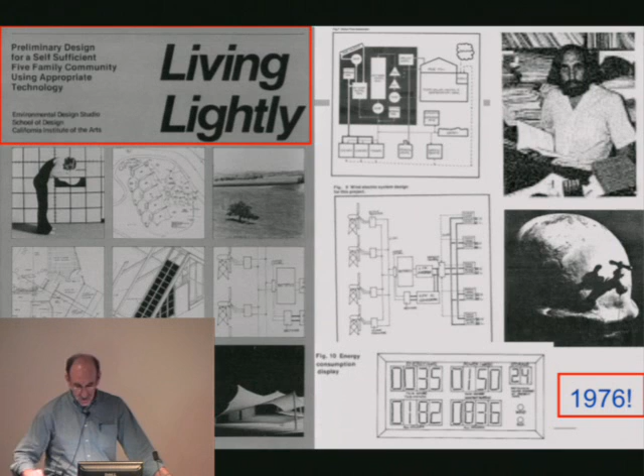So this is only 35 years ago. A lot of the ideas we're talking about here aren't exactly new. That doesn't mean they're bad or useless, but it's also useful to go back and look at what people have been doing in the past and ask why none of this made any difference for the last 35 years, and what we can do differently now that might change that.

I think most of you know the big picture for buildings — did I skip one there? No, I decided not to use it. Buildings are the largest and fastest growing end use of energy.

On the electricity side, buildings account for over 70% of all electricity used. So when people talk about smart grids, they're typically talking about power plants, transmission lines, sensors and networks. But when I think about the smart grid, I think about where it's all going, which is buildings.

It would be nice if there was one thing we could invent or develop that would, quote, solve the building energy problem. But there isn't. This breaks it down by residential, commercial, and by end use — there's about 20 different end uses that constitute probably 80 or 90% of the energy used in buildings. If you're going to make a big dent in that energy use, you're going to have to address all of those. This is a slide from McKinsey that you've probably all seen before.

Cost of carbon and savings on the horizontal scale — the ones on the left, below the line, are the ones that pay back. What's intriguing is not the data, because quite frankly I can show you studies from 20 years ago that look a little different but say the same thing.

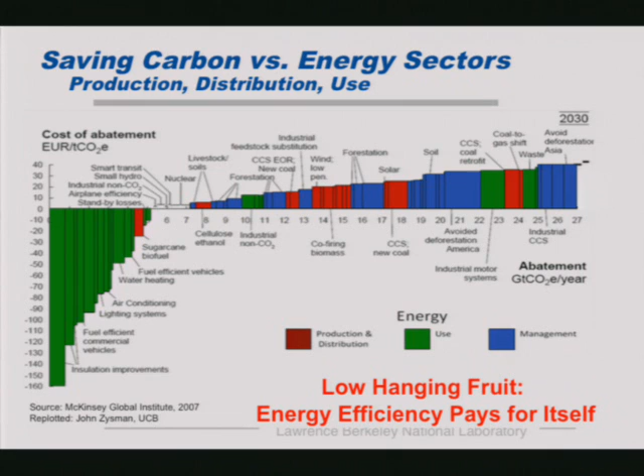The way I look at this is, if this is real, and I think it is in terms of the data, the stuff on the left shouldn't exist. If we're economically rational beings, and this stuff has 1, 2, and 5-year paybacks, why does it even exist? It also tells you it's not enough to simply come up with technical solutions — you need to figure out what the obstacles and impediments to the marketplace are. Otherwise, we'll simply grow the curve on the left even larger.

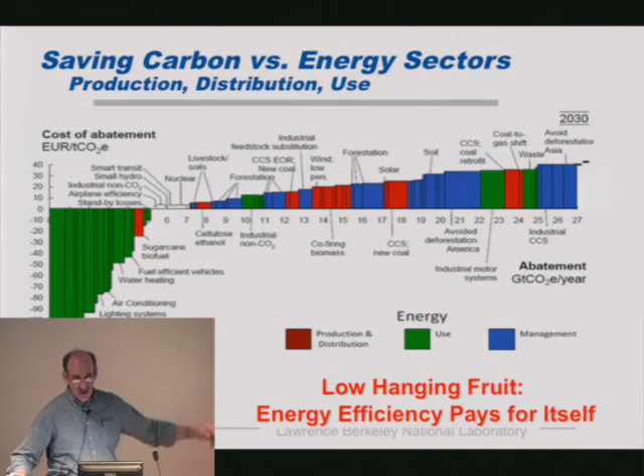If you look at the building sector, you come away quickly with this being a messy, complicated set of things to look at. There's a complex decision-making process, a lot of people involved, a lot of money involved, which makes it complicated, and long lifetimes involved here. And the industry is fundamentally fragmented.

You go to two owners of identical buildings — one owns it, one leases it — and you get completely different responses and levels of interest. The bottom line, though, is the savings potentials are huge, and that's what we need to pay attention to.

Sometimes people ask me, what is it we should do? How do we approach the problem? Who's in charge? Who needs to take ownership of this? The answer is pretty much everybody. This is classic — if you ask an architect what the energy problem is, you get one answer. If you ask a researcher what the problem is, you get another. They're all right, and frankly they all have to work together to make this work.

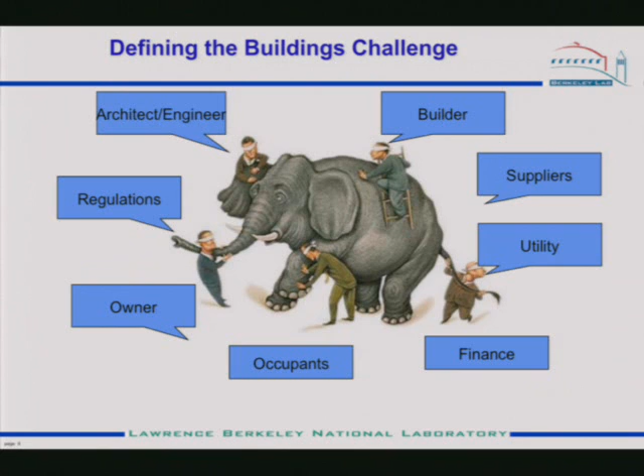You can ask the question, is there evidence that if we do something, it will matter? This is a chart I'm sure many of you have seen before. It plots electricity use per capita in California versus the country. You don't have to be a rocket scientist to say that California is doing something different here. Something has changed, and it's interesting to go back and look.

There's a lot of subtleties here, and there's plenty of work for someone to dig in and do multiple theses over time. But the bottom line is California has a policy to reduce energy use as much as possible, and it's backed that policy with investments in research, deployment, and a variety of other activities. Now, I'd argue this is a good news, bad news graph.

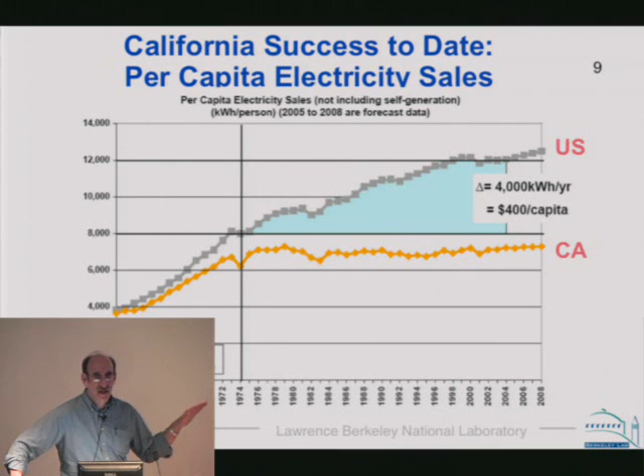The good news, of course, is it's flat and it's different than the U.S. The bad news is if you look at absolute energy, it's grown by 30 or 40% because the population of the state has grown. So we need to be careful here. This is per capita, not absolutes. And what we're trying to do in the carbon world is to reduce absolutes.

Now, California continues to be aggressive, and it's a model for the rest of the country in many ways. They've developed a series of goals to 2020 and 2030. I'm going to talk a little bit about this zero energy building goal in a second. These are the right kinds of goals, but they're very aggressive. I don't think in the real world today, in the environment we live in, that these are achievable. Technically, they could be achieved if we put our minds to it, if the politicians decided they wanted to do it. It could happen.

If I look at Washington and look at the healthcare debate, I get a bit frustrated and sort of pessimistic. But anyway, let's go on to more exciting things.

So the question again: can you make a difference? Can you do something that makes a difference? This is a chart from some of my colleagues looking at the energy use in refrigerators over time. The blue chart shows the energy use. It rose almost linearly from the 40s or 50s up to 1973, and then all of a sudden something happened in '73, and it tipped over and went down almost as fast as it went up.

What happened was a whole series of mandates, standards put in place first by the state and then by the feds. Now the interesting thing is there are two other plots here.

The red plot shows the size of refrigerators, and you see they were increasing for a while, and you could argue the reason the energy use went up was because they were getting bigger. There's a little moral there too: if you extrapolate anything - I once did the calculation - in 2200, refrigerators would be larger than houses. So it makes you think you should be careful about extrapolating trends, right? It levels off because you can't get them through doors anymore. Once you can't get a fridge through the door, the size levels off, more or less.

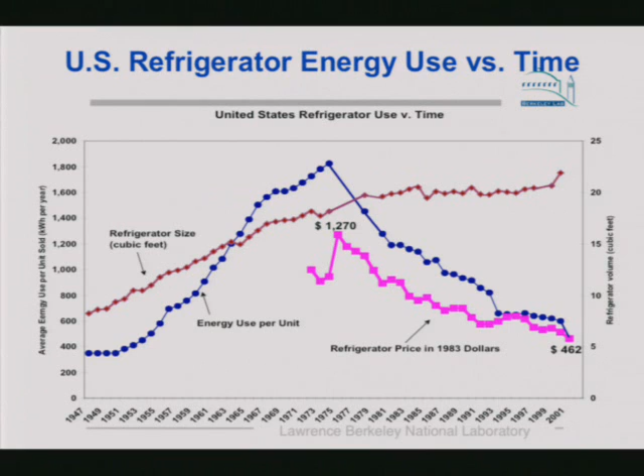Here's some other evidence from a National Academy study done about 10 years ago. They went back and looked at research from the 80s, and looked at 4 or 5 different things, a number of which we were involved in: window coatings, ballasts for lights, the appliance standards I just talked about. They calculated the market impacts and the savings, and they also went back and looked at the R&D investments. To oversimplify a bit, these were R&D investments on the order of tens of millions of dollars, and they delivered savings at the level of tens of billions of dollars.

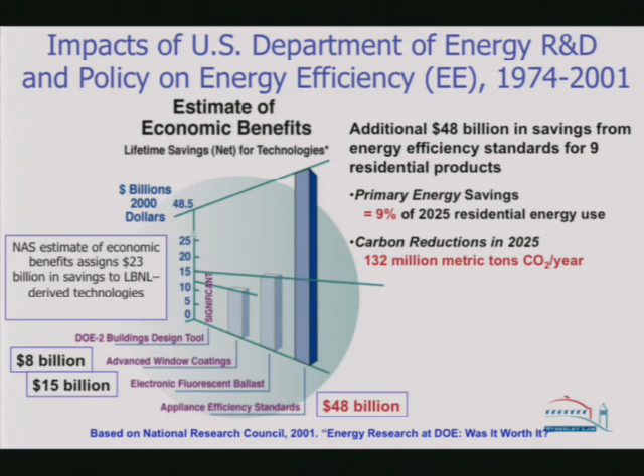So if you're a country or a state making investments in research, if you get even a few of them to have big payoffs, as was shown here, they more than pay for the entire portfolio of activities.

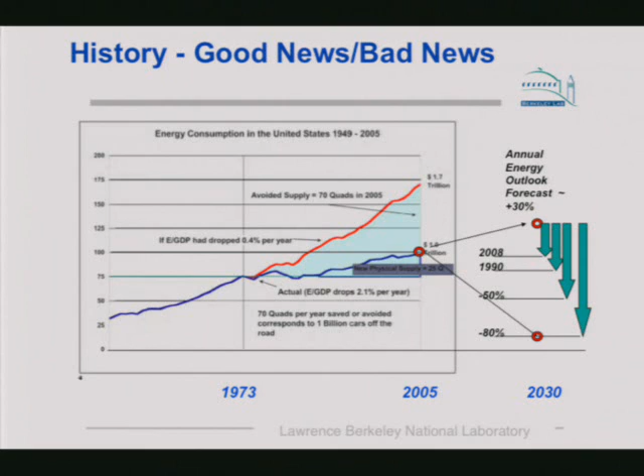So here's the challenge for the country now. Gone from the state and refrigerators to the country and all energy use. The blue line is actual total energy use for the country up to 2005. The red line, starting in '73, is what we would have used had we continued to use energy at the same rate as before, in terms of energy per unit GDP. So again, the good news is that we've slowed the rate of growth, but we're still growing.

And if you look at the right, these are various requirements at state and federal levels to reduce energy to either 1990 levels, or by 50%, or by 80%, out in either 2030 or 2050. It's a lot more complicated than this - some of these requirements are carbon, not energy, and that adds another dimension to the problem. But the point I want to make is that all of these mandate reductions in absolute energy use, and we've never done that before - well, we've never done that at the societal level or the sector level.

I just showed you that we did it at the refrigerator level. So there's a real challenge and an opportunity. One of the things we've done is we built models, business models or economic models, and energy models of the building stock. This is one of the commercial stock.

We can plug in scenarios here over time. Here we go from 2010 to 2030, with new buildings, retrofits, renovations, and the degree of savings in each one. We can add some PV if we want to, and on the right you can see what happens as business as usual, shown as the dotted line. We've actually managed to make the energy use of the commercial sector bend over and decrease in absolute terms, and by playing with charts like this you can begin to get a sense of what you need to do, either technically or policy or both.

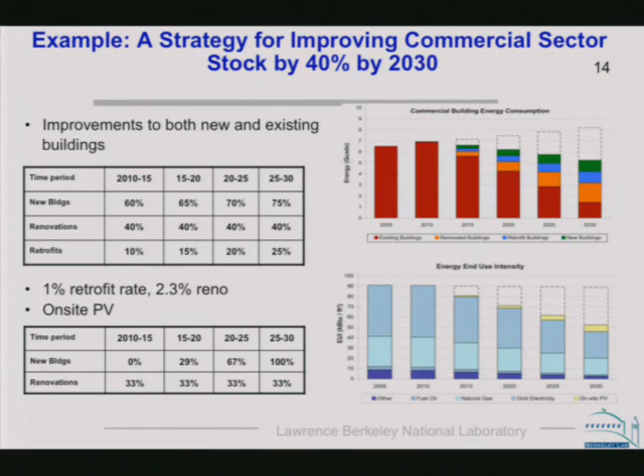So here's an example of implementing this as a policy: new construction saves, or half of the new buildings built save 50%, and every year you retrofit 10% of the buildings and save 50%. It's a whole other discussion about whether that's feasible or practical, but this is the resultant curve. It shows a decrease for about 10 years and you meet the 2020 goal, but because you're not aggressive enough in new construction, it rises over time in the end.

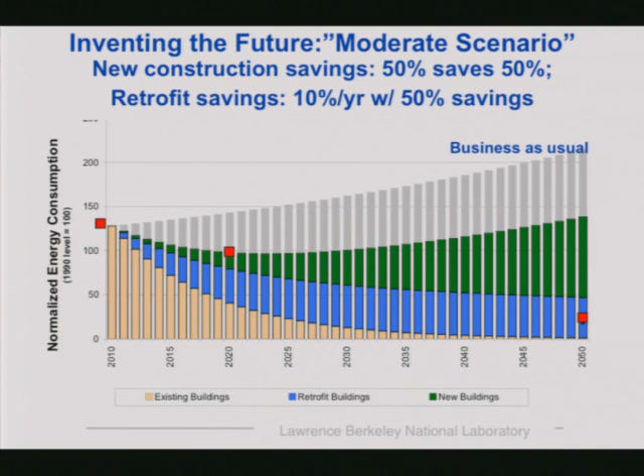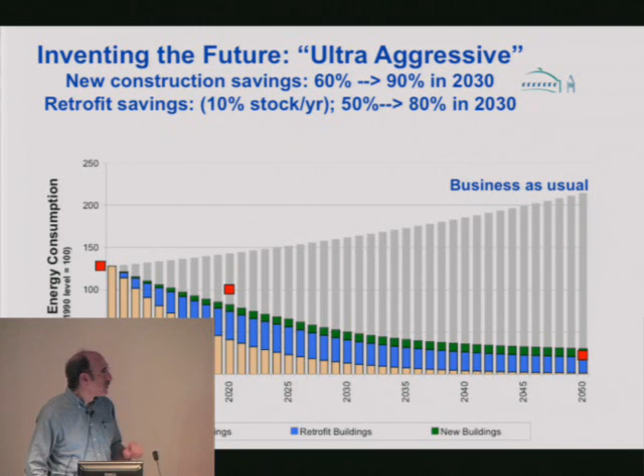Here's a scenario that actually gets you to this amazing 80% reduction goal by 2050, but this is a sort of superhuman effort where basically all new and existing buildings are using only 10 or 20% of what they're using now. But it's an interesting tool to give you a sense of the magnitude of what you need.

So this concept of a zero energy building, a net zero energy building—some people take it literally, that if you take a building and put enough PV on the roof, you bring the energy use down to zero. A net zero building is actually a building that generates as much as it uses, therefore its net impact is zero.

So there's a group out there that says, sure, we can do it, we can find 5 or 10 buildings around the country that have done it, let's just go do it. I think it clearly is technically achievable, but it's not financially viable, and it's probably not the right thing to do if the building you start with isn't a very efficient building.

So the simple message here is the second line down, the net ZEB. What we should be doing is looking at 60 to 80% savings first, squeeze all the efficiency out that we can, and then the small part that's left we attack with renewables.

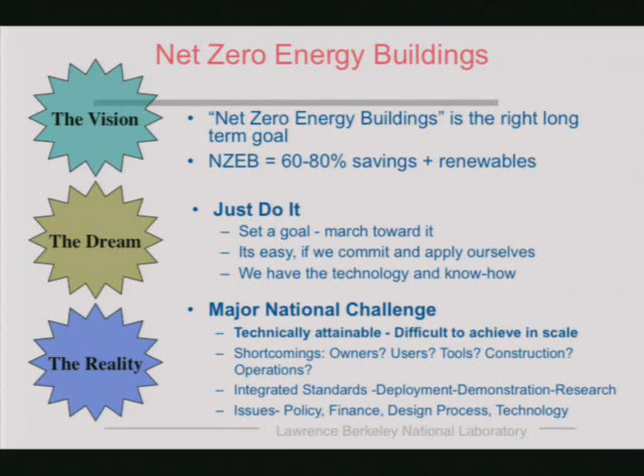Here's just a concept diagram that shows that over time. This is for one of the DOE programs—if you can drop the energy use over time and bring up renewables use, this just shows that in 2020 they're crossing, and you're at net zero there. The line at the bottom is another example.

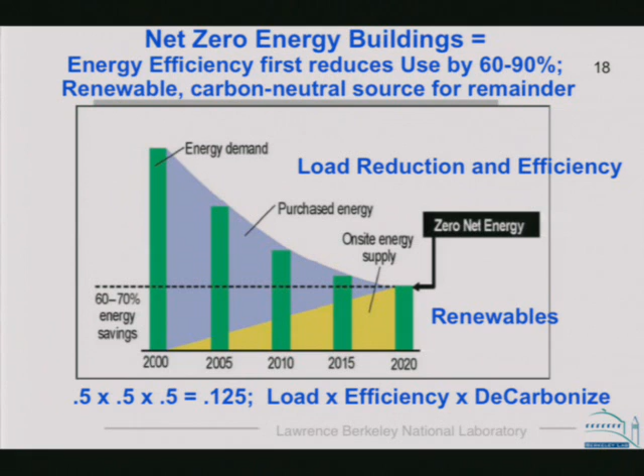If you want to meet these aggressive goals for 10 or 20% of carbon, you could reduce loads by roughly half, reduce the energy needed to meet the loads by half to make things twice as efficient, and then for the remaining energy use, supply it with a source that has only half the carbon content of the existing one. So there are scenarios to get down to these very low numbers, but they're very aggressive and challenging.

This is a slightly complicated slide, but it tries to show that in the buildings world you need to pay attention to issues like building size and climate. It's relatively easy to do a net zero building in a small building in a mild climate, and that would be shown over on the left here.

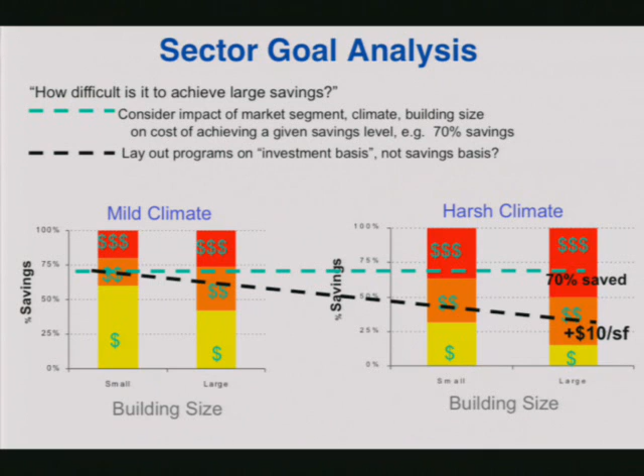On the left-hand one, it would take just the orange amount of money, which isn't so much. But if you were to try to do this for a large building on the right-hand side, it would cost a lot more. The other way of looking at this is to say, what if I want 70% savings, which is that green dotted line? I can get 70% savings with a modest investment in a small building in a mild climate. It will take a lot more on the right. So this is very much a climate-dependent and building-type-dependent situation.

And because of this, sometimes it's useful to think about the breadth and the depth of the impact you can have. So on the left side of this chart here, we're showing in the upper left a building that's kind of narrow and deep.

This would be a one-off building, a net zero building where you can demonstrate that it really works. On the right-hand side, in the lower part there, we're looking at broad impact potentially. These are the ESCO's energy savings contracts that typically save 5 or 10% in each building, but they use technologies in the market. It's relatively cost-effective. You can think about deploying it widely.

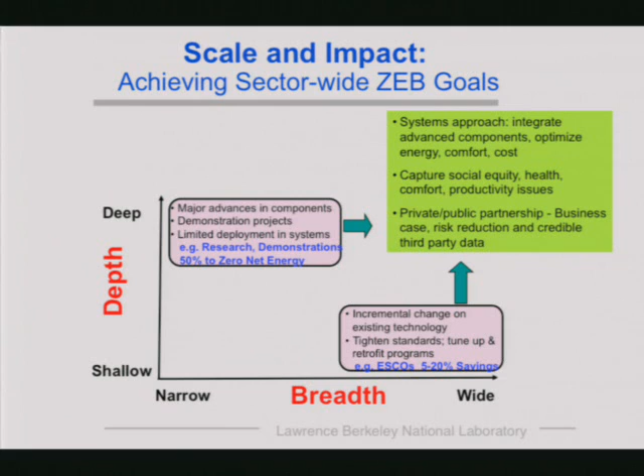Where we want to be in order to get the carbon savings and energy savings I talked about is in the upper right-hand corner. So we need to figure out, with technology and policy, how to do the breadth that the ESCOs get today with small savings, but do it at much greater impact. That's the challenge. So here's one way of looking at the challenge.

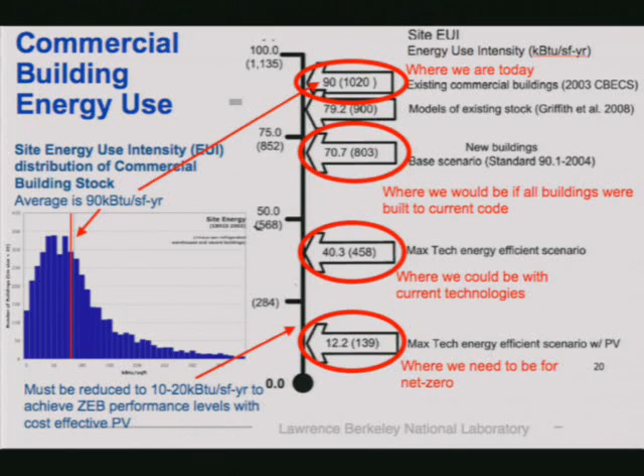But that could be a data center. And if that's a data center, that's probably a really good number. If it's an office building, it's a lousy number. So you need to know climate, building type, and size before you can begin to infer whether these are good or bad.

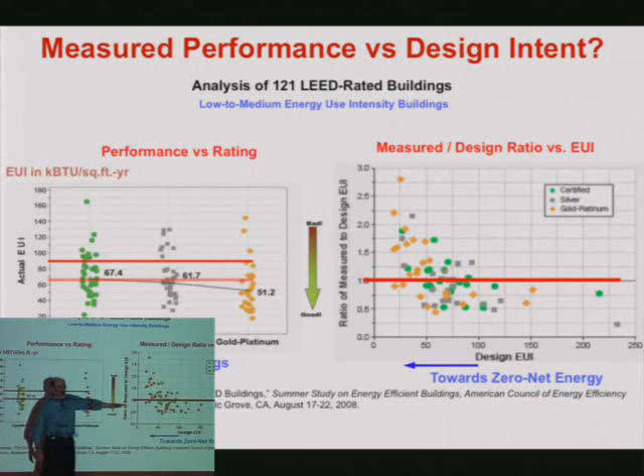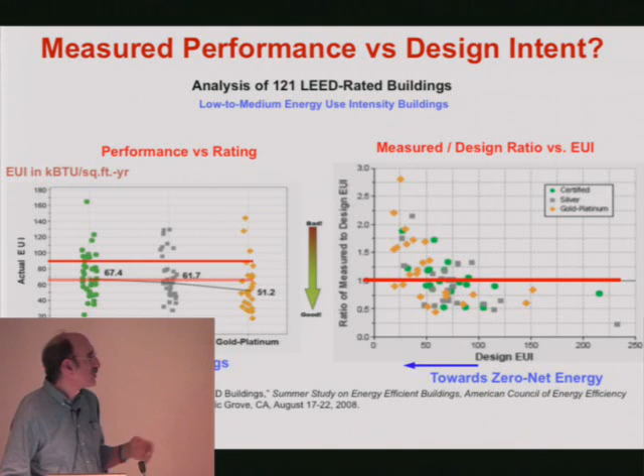What you find is you actually get better performance than predicted out here. But as you try to get better and better designs, lower and lower energy, the actual performance tends to consistently lag the predicted performance. If you're a building owner, that would be a bit of a problem. If you were trying to do a financial deal based on that, it would be a problem.

We're fundamentally a research group, and we look at the kinds of issues and problems I've been talking about and say, well, what is it we can do about that?

So there's a variety of classic R&D. Let's go invent a disruptive technology that solves some of these problems. We do a lot of real-world demonstration to get out there and show what works or doesn't and why. Our view here is that the role of R&D is to facilitate this change, but to do it in a variety of different ways.

We work in the area of materials and components. We work in the area of integrated systems. We do tools, and we focus a lot on what really works and why. I'm going to give you some examples of this.

We put together some lists here of what are some of the R&D breakthroughs that might make achieving these high performance levels much easier. A set of materials and systems on the left, balanced by a set of kind of operational issues on the right. And we give them equal weight.

I want to be clear that there's lots of opportunity. A lot of people approach this from, if I can just invent a better light bulb, the problem gets solved. You need to put equal weight on the operational issues on the right there to make all of this work.

On the research side, there are interesting issues of scale. In this case, we're looking at both time and length, the dimension. So we study and look at things that happen at the level of a room at the meter scale, and we look at things that happen at the whole building scale. There are interesting issues of time that I'm going to get to later, so I won't get into it here.

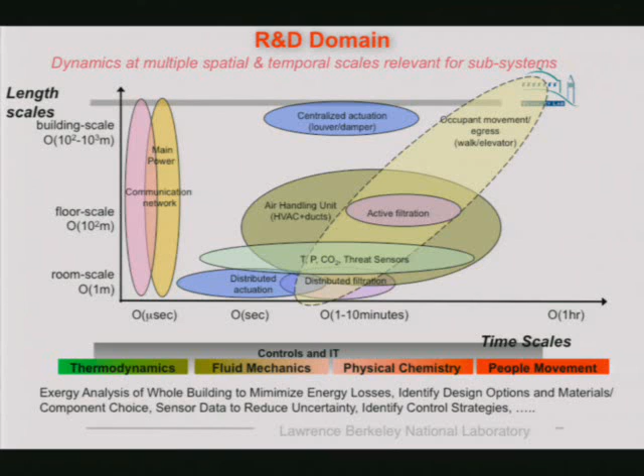But looking at the issues of heat transfer, looking at the issues of airflow, air and mass flow, looking at issues of communications versus power transmission. It's interesting to look at problems this way and see what insights it gives you into what to do.

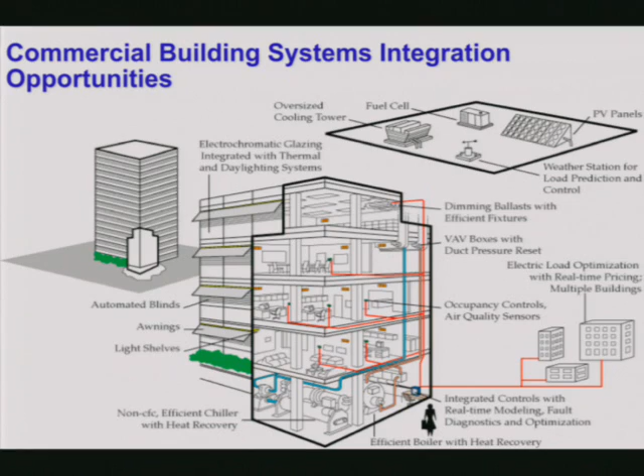Integrated systems. There is opportunity in components, but there's probably more opportunity to get the components arrayed into systems that work right. This is just a concept diagram with lots of pretty pictures, and the same thing over here.

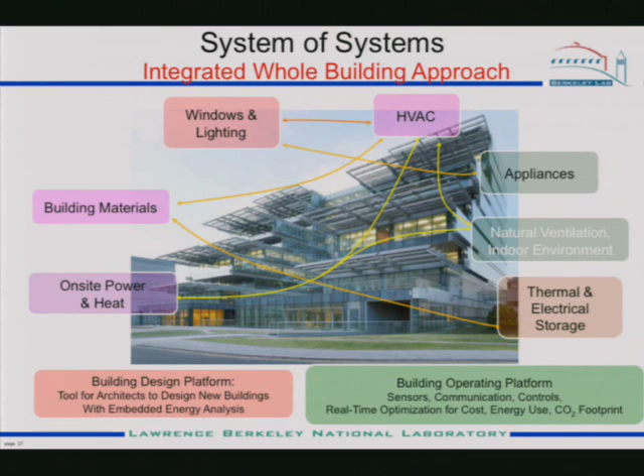I'm going to give you some examples now of some projects we've done. We've tried to take these concepts or principles and apply them in the real world, and I'm going to talk about some of the work in the glazing, facade, shading, daylighting area.

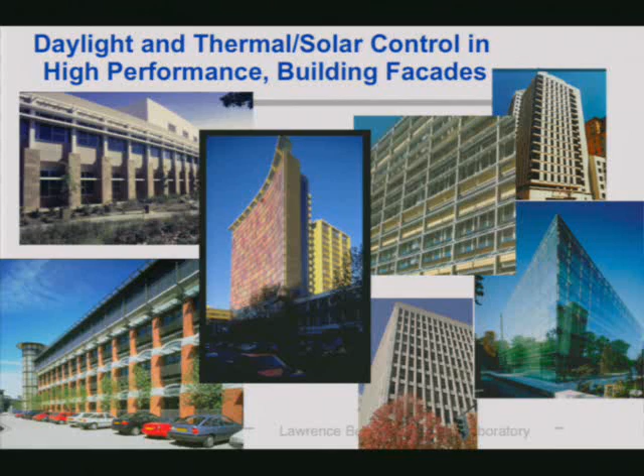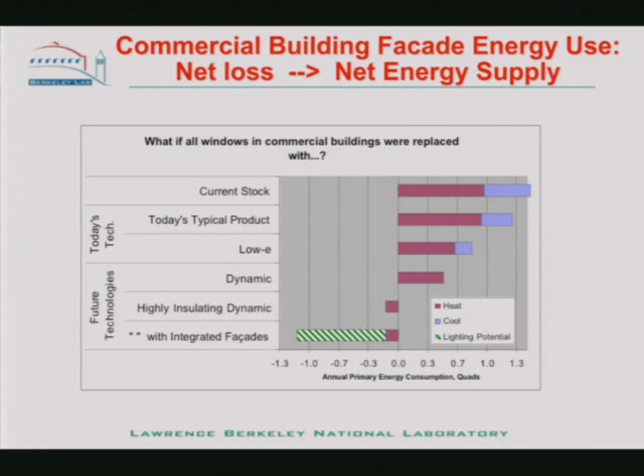First of all, we've done some interesting calculations to say if you could magically convert all the windows in all the buildings in the U.S.—actually these are commercial—into much better products, what would the national impact be? This shows you that you actually get the envelope of the building itself to become a net energy supplier. I won't get into the details.

We've written full papers on this, what technology it takes, how would you use it, how it performs in different climates. This idea of efficiency being a source, which is underlying it, is something you can't read the date up there, May 1988.

We did this little brochure that showed if you build a coating plant that coats energy efficient windows, and you sum up all the energy saved by those windows, it turned out to be equal roughly to an offshore oil platform. So again, as a nation, people underestimate and underappreciate the magnitude of the savings possible through efficiency.

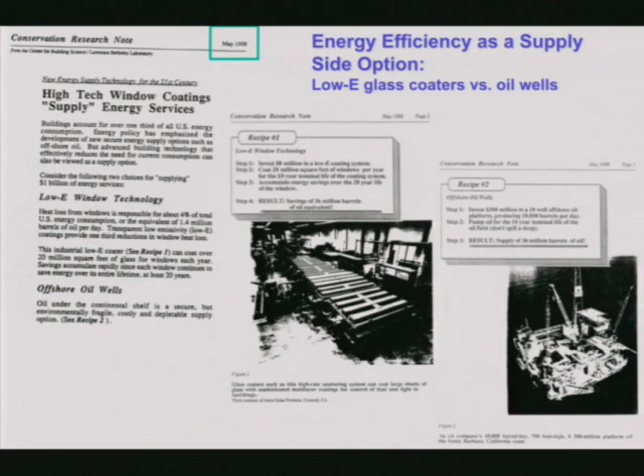So if we look at this issue of technology in the glass and windows area, there's a variety of different things that you want to do, invent, or develop that tend to be climate specific—heating, cooling, lighting, daylighting.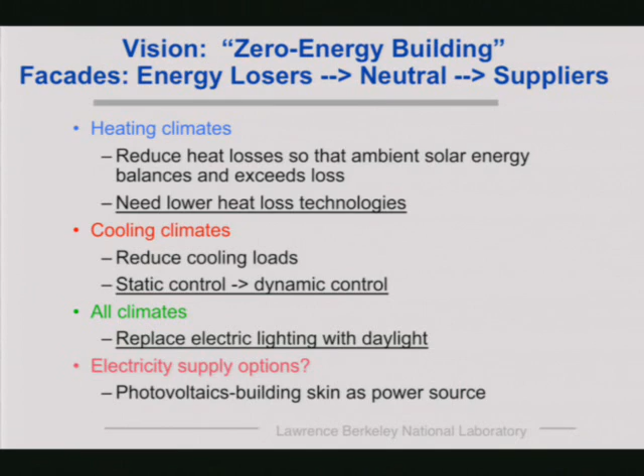I do want to make another comment about the renewable side, and this is a balancing act, and I'm not pro or against anything. But if I take sunlight and convert it through PV to electricity and run it through a lighting system like the one above your head, and get to the net use of power of sunlight in the room, you get about 2% efficiency. 2% of the light on the top of the building ends up providing useful light here.

If I do it through a skylight, I get about an order of magnitude greater, about 25%. If I do it through a window, I get maybe 3 or 4 times greater. So this is not an anti-PV statement.

It does say, though, if you're using PV to light a one-story office space that could have skylights punched in the roof, you're not making a very good economic judgment there. Skylights won't power my laptop or your toaster oven or things like that.

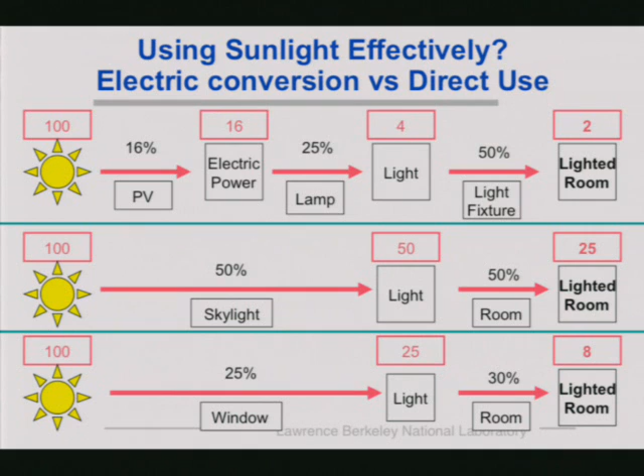So there's plenty of important use for PV. It's a question here of doing the right thing on efficiency first.

There's all kinds of technology for this daylighting stuff too. This is a Japanese system that tracks the sun and funnels daylight through Fresnel lenses into fiber optics and beams them down. It works, I've seen it work. It's just about two orders of magnitude too expensive to be scalable.

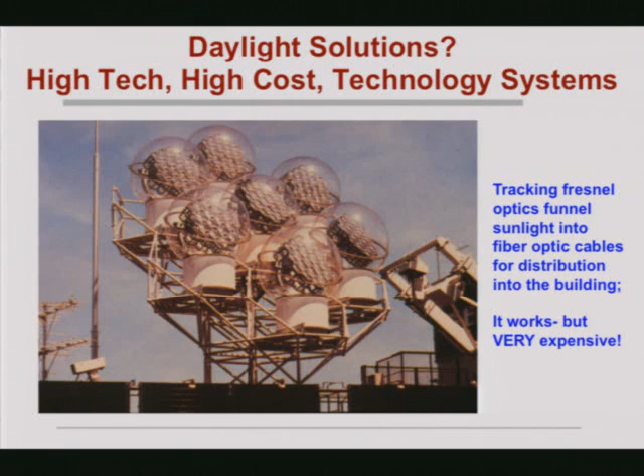One of the things that changed for me in the last 20 years: 20 years ago we were looking at what can you do? Now I look at what can we do, but then I always ask at the end, is it scalable? If it's not scalable, we're a little bit less interested in it than we were before. So this is one of the ways we think about the research, the opportunities in research, and how to take that research out into the field.

So this is an example of what we call smart window coatings. These are coatings on glass that change from transparent to clear, from transparent to either reflective or absorbing. So there's a material science component to this.

We have labs where we invent new materials. We've invented, patented, and licensed materials to other people. We work with manufacturers because it's great to make these little samples at two inches square, but if you can't make them at two meters square and at low cost, you're not going to have impact. So we work with manufacturers to make sure what we're doing here ultimately can be made at scale and cost.

We have an optical coatings lab that we make available to industry to characterize all this stuff. We have simulation tools that let you ask, if I take this glass and put it in a window frame system, then put that window system on the fourth floor of this building facing west, how will it perform? And we eventually go out and look at the human factors, go into the real world in test rooms and real buildings, and make measurements.

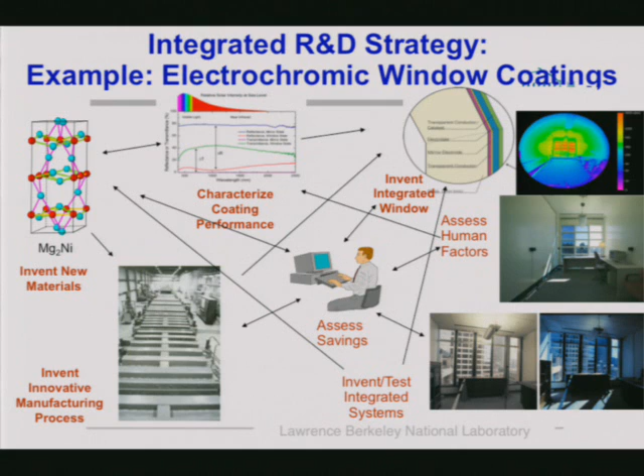It's that combination of activity that's ultimately needed in one form or another. It doesn't all have to be done by one group, isn't all done at one time, but basically if you don't address that range of activities, you're going to have trouble making the impact that we have.

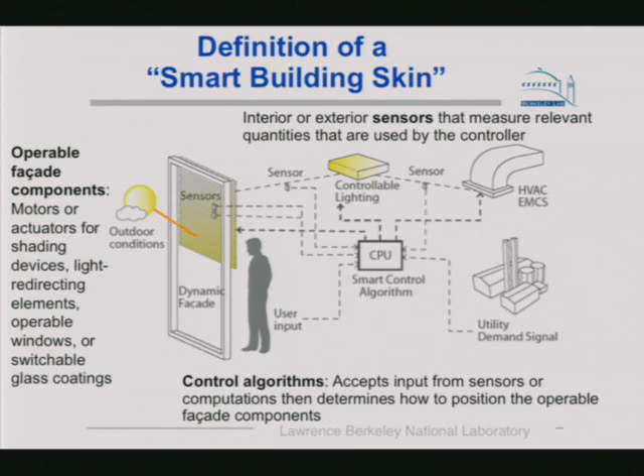So this is an area where we put these pieces together, and we've actually had for about 10 years a program — we call it different things, this slide happens to say Smart Skin. This is a program funded by the Department of Energy and by the CEC PIER Program that funds work here as well. It tries to bring together a lot of the different pieces and parts to make a system that will provide comfort, performance, and big energy savings.

So we go back and ask, well, how big are the savings? This is a daylighting example: an office building in Emeryville, a before and after — this was a retrofit. We measured it for a year. These are the days of the year, and we measured the lighting energy for a year.

The lights were on in the morning and off at night, pretty much the same. We put in dimmable lighting controls and measured anywhere from 40 to 60% savings on one side and 40 to 80% on the other side. Interestingly, the bigger savings were on the north side, not the south side. That was counterintuitive — there's more sun, more light on the south. But it turns out there's also more glare.

What do people do? Behavior — people pull the shades to control glare. So you pull the shade in the afternoon. Do you open it up at the end of the day? Do you open it up the next morning to capture the daylight benefit? Not necessarily — you're probably not paid to be a shade manager, you're paid to do some kind of productive work.

This work, by the way, was done in 1990, so this is 20-year-old work. And after 20 years of promoting this and talking about it, dimmable lighting that captures these savings is still only a couple percent of the marketplace.

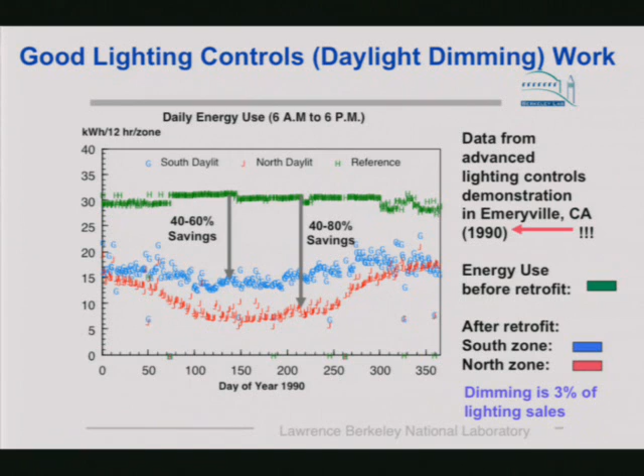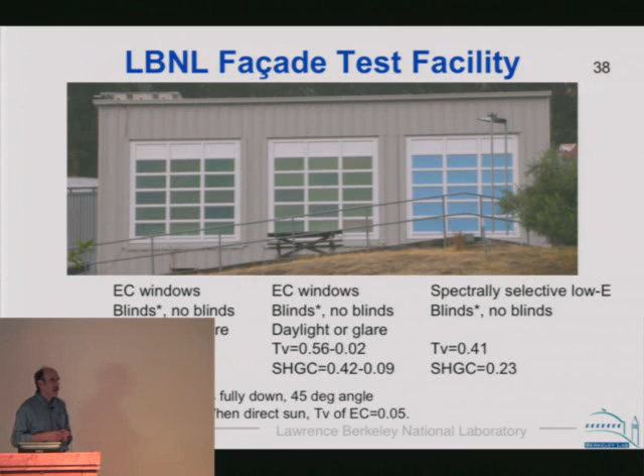The problem is I go to an engineer and say, look, if you do all this stuff, you'll reduce your cooling load. Why don't you specify a smaller chiller? No engineer is going to do that because someone says, well, let's hope that everyone pulls the shades in the afternoon. So we've tended to go toward automated systems to reliably capture the benefits of this smart technology. And we get lots of pushback from that, quite frankly. I used to say, well, we know it's possible, look at the Prius, it works in the automotive world. But now I'm not going to use the Prius example for a while until they fix that.

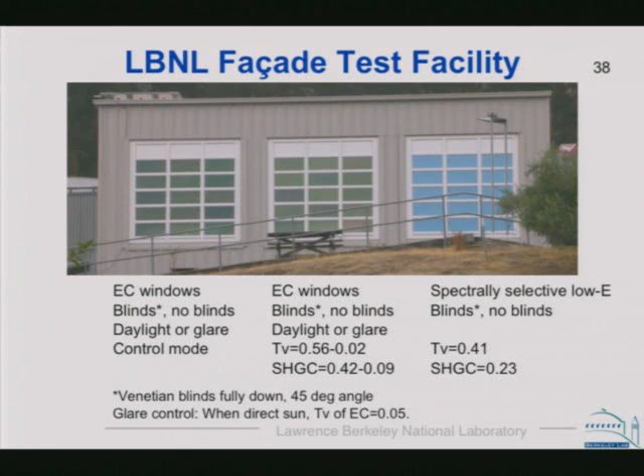So integrated systems, again, is important. We built this facility at the lab. It's three side-by-side rooms where we can install real hardware and test actual performance under realistic conditions. That's the outside, this is the inside. It can be set up in experimental mode filled with sensors, so full you can hardly walk through. Then we clean out about 90% of them and put people in here, letting them work under the automated system or with manual control, and look at what happens in terms of satisfaction and energy savings.

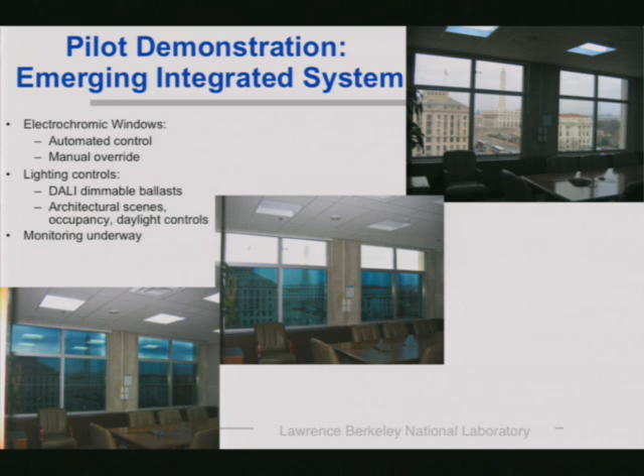I want to optimize. So we built control modules that optimize for total energy, for peak, for comfort, and you get different results in terms of how to drive it. That was one of the things we were beginning to look at here.

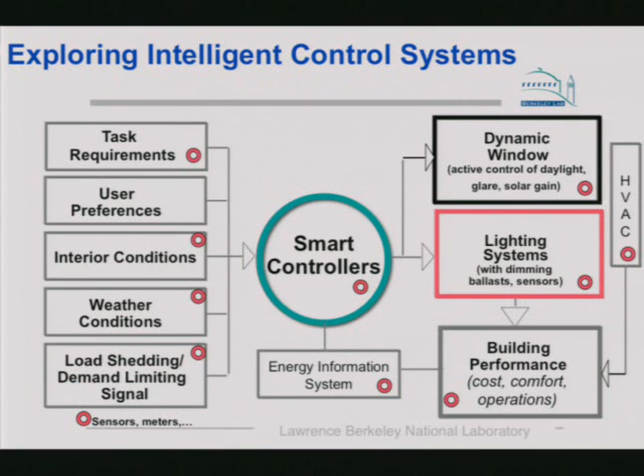So we have this concept of smart controllers that take inputs from a variety of different engineering and other means. Based on what you want to optimize - which may differ for different people at different times - it will control a dynamic window, control a lighting system, and drive building performance with a closed loop here, with the energy information systems coming back to tell you what it's really doing.

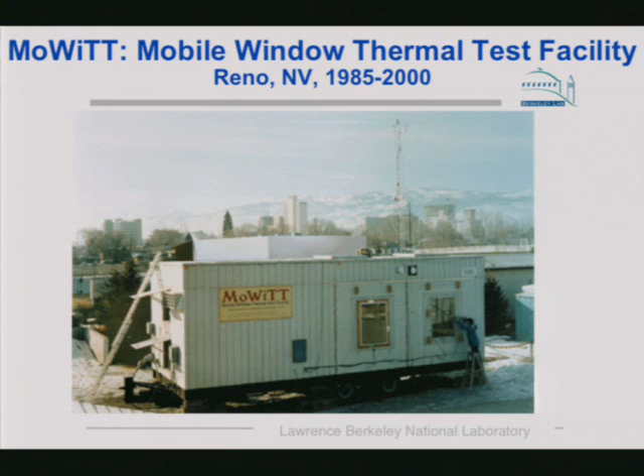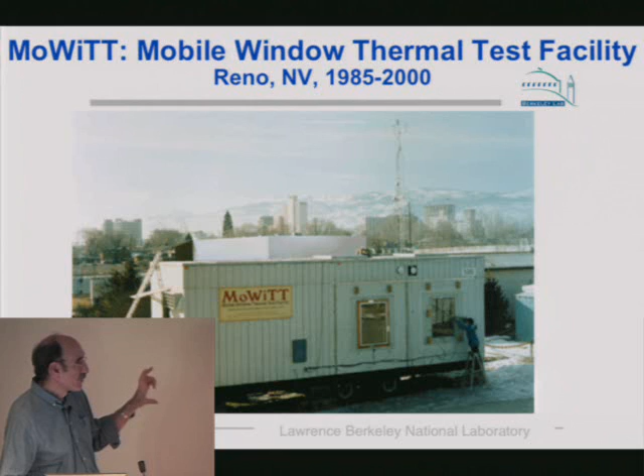We operate lots of interesting facilities. Notice the snow in the hills - this is not Photoshop, it's not the Berkeley Hills, this is Reno, Nevada. We built this and moved it up there. We haven't actually used it recently, for a variety of reasons, but it made highly accurate measurements on real products under realistic conditions. If you want to test things in winter freezing conditions, you'd wait a long time to do that in Berkeley.

I heard just last week that it got value engineered out. So you might have been a site for one of these interesting new systems. These are widely used in Europe, been there for 20 years. They work, they're a bit expensive, but they're hardly used in the US, and we're trying to promote that.

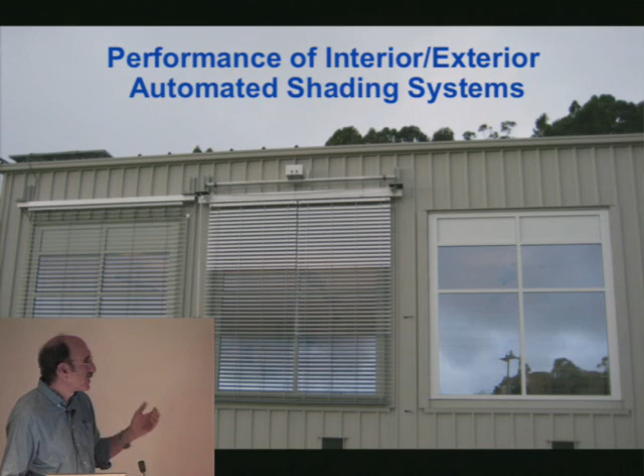We also looked inside the space, so this is a blind. I mean, this isn't rocket science. Let me go back. The electrochromic coatings, that's rocket science. That's cutting-edge material science, it's a tough problem. Patents. It's an interesting challenge that was still with us after 20 years.

These are blinds, Venetian blinds basically, with cords and straps. This clever blind simply operates the upper part a bit differently than the lower part. It provides better glare control, lets in enough light to keep the ceiling bright. I mean, that's not a Nobel Prize-winning solution, but it works, and it could save huge amounts of energy.

And this is some stuff we're trying to capture the qualitative aspect of the environment at the same time, to make sure that we want to drive the blind in a way that ensures there's never unacceptable glare on the computer screen at the workstation.

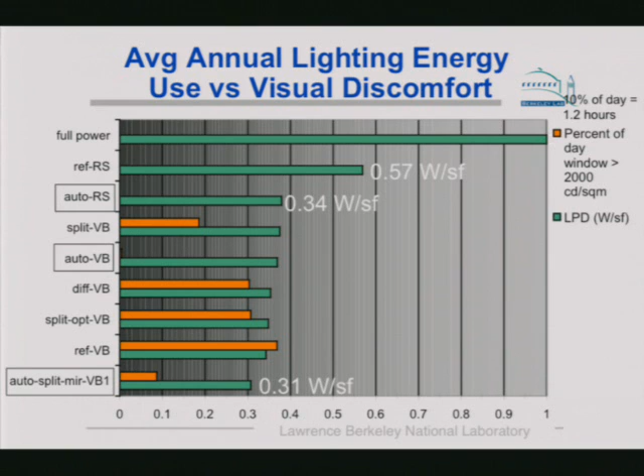Some analysis, and the message here is that many strategies get you good energy savings, which is the green, but only some of them give you good glare control, which are the automated systems. So our experience is we needed the automated systems in order to capture that.

Making the business case for this, what we're trying to do is look at the system differently. Instead of just saying here's my room system, it costs a certain amount of money, it saves a certain amount in heating, cooling, and lighting, I divide the two and get a payback, I want to go outside this and look at how decisions about facades and lighting impact peak cooling. Peak cooling drives chiller size. Chiller size is a big investment in buildings. And furthermore, chillers and lighting between them drive power investments, either in a central power station or on site.

So what I want to do is invest intelligently a few extra bucks on that dynamic coating or shading system, and in the end save money on the right-hand side. If I can figure out a clever way to move the money around, I can pretty much pay for a lot of this stuff by taking it out of there and there. Now, that's easy to show from an engineering side, but it's quite complicated to make it work in the business world.

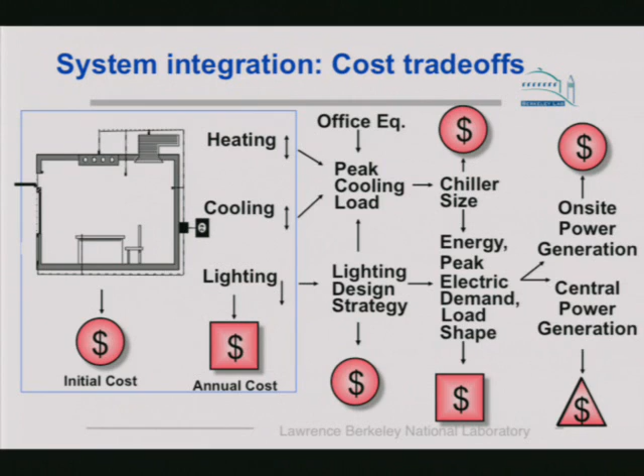Why is all this money stuff important, and why have I talked about glare and comfort? Because look at these crude numbers - approximate, but I think they're pretty good. Energy is on the order of 1% of the value of labor in spaces. Where do I get this number from? A lot of you are students, but those of you who work for a living, take your salary, multiply by 2, that's all the overheads your company pays, divide by the square footage of your office, and that should be the number.

Actually, this is in meters squared, just so you don't panic - I have a metric version and an IP version. So if your number, when you do this in your head, is much higher, either you're overpaid or your office is too small. And if the number is too low, then you should ask for a bigger salary or a smaller office or whatever.

Okay, so let me now go from the test facility world, where we've gone from calculations and inventing coatings at the level of a lab to a real integrated system, or an integrated system in a laboratory environment, and now go to the real world and say, can I convince anyone who invests money in real buildings that this stuff makes sense?

This is the New York Times building. They came to us 5 years ago and said, look, we just hired a European architect, and they've given us a beautiful all-glass building. Now, that's a side discussion - should they have done an all-glass building in New York? But anyway, all-glass building with some external shading. They said this building can be daylit, capture lots of daylighting savings, and they're doing other interesting things like underfloor air, many interesting things. But they said, we want to make sure that A, we capture the savings, and B, the work environment is conducive to people seeing their computer screens.

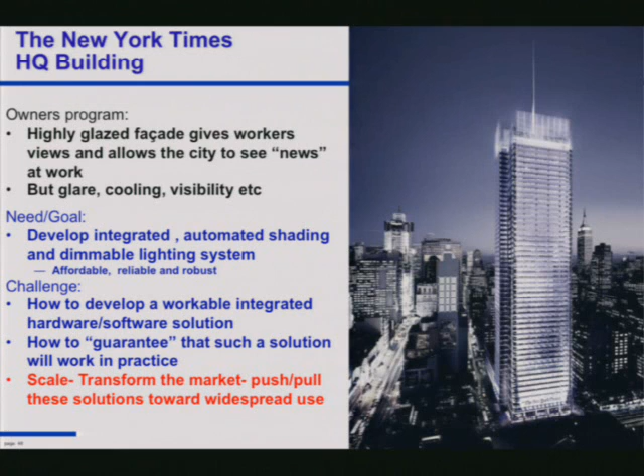Can we do an automated shading system with dimmable lighting? They went to all their consultants and were told no, you can't, and even if you could, you couldn't afford it. But they had actually seen some of those studies I showed you before, so they flew a team of 12 people out in the corporate jet. They spent 2 days with us, and we convinced them it was possible, but that they'd have to work really hard. What we convinced them to do was build a mock-up.

This is a 4,500 square foot piece of a floor plate, the floor plate of that 52-story building. In that mock-up, we fitted out the interior completely with different types of shade systems and different types of lighting systems. We developed all kinds of new instrumentation to monitor the glare on computer screens, and we obviously measured all the energy stuff.

After a year of testing, we addressed all of these different issues. The interesting thing we did was not to pick a winner and say shade A wins and shade B doesn't, but to develop a performance spec, which we then bid back out into the marketplace.

We've done this kind of thing before. We said this is what should be developed. But frankly, the market doesn't pay much attention to a researcher at a university or national lab saying, oh, it would be nice if your dimmable ballast had a DALI addressable system. But when an owner says, I own a 1.5 million square foot building, I'm going to buy a lot of this stuff, guess what? The manufacturers pay attention.

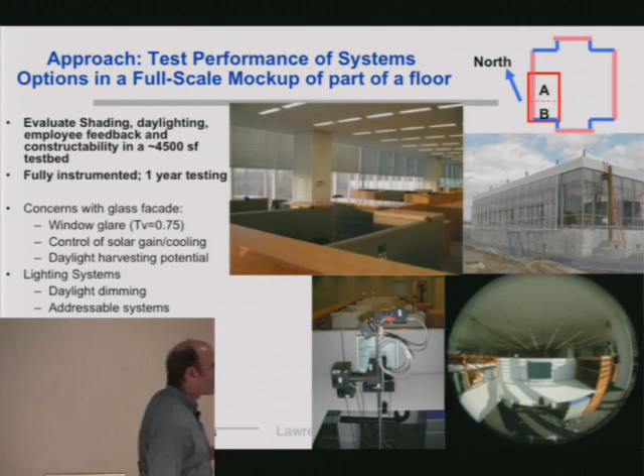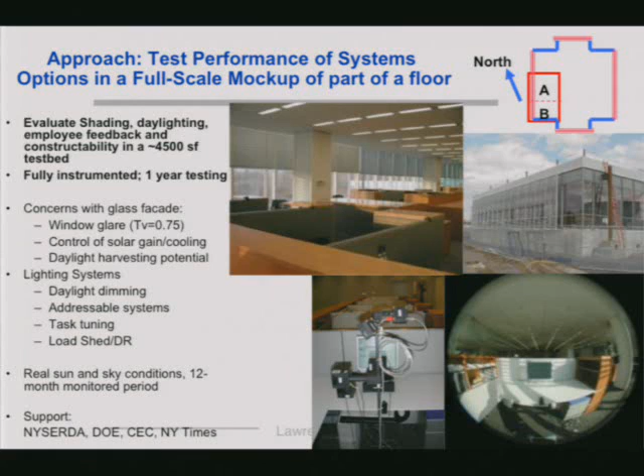So they actually developed brand new systems that met this new spec, which their existing systems couldn't do, in less than a year. We put them back in the facility, tested them, and verified that they worked. We actually built commissioning tools as well to make sure they would work. And the building seems to be performing quite well.

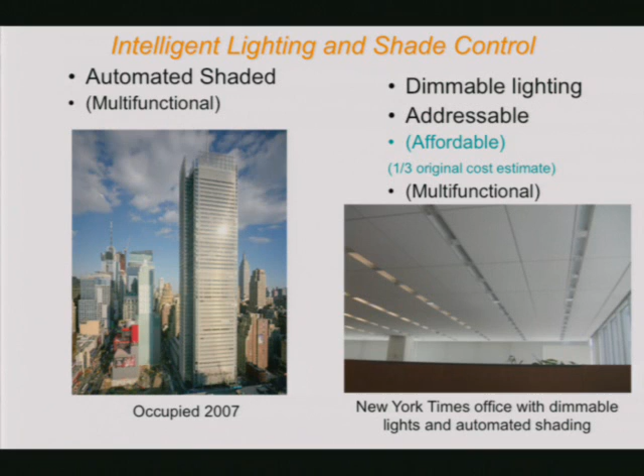This is as built. It was occupied 2 years ago. A picture in the building: shades are down here, the lights are off here, and they start to dim back up here. The manufacturers published data that says 70% savings.

This is a building across the bay, the San Francisco Federal Building. Again, interesting and complicated, but 12 floors of this building have no mechanical cooling. They use natural airflow at night when the air is cool. Windows open automatically, and the airflow goes across the exposed concrete ceiling, storing the cool. There's a lot of sophisticated CFD modeling here, airflow modeling and design.

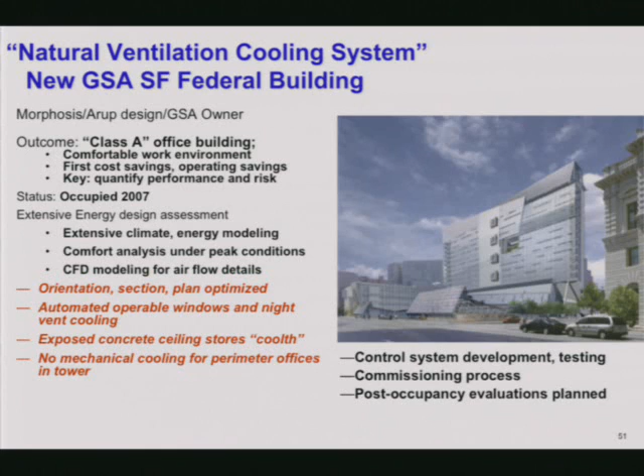It's a systems integration issue again. If the sensors don't do the right thing at the right time, the building doesn't work, and there's no backup. There have been some issues getting all this to be right, but I give GSA a lot of credit for trying it and for pushing forward, and the whole design team for getting engaged here.

Lighting is a huge opportunity. If you don't pay too much attention, the answer you probably think is LEDs, right? LEDs are going to solve the world's problems, and they probably will, about a decade or two into the future. They exist today and are getting to be as efficient as fluorescents, although not quite there yet, but they're very expensive, and we have a lot of experience with things that are efficient but expensive, and they don't penetrate the market.

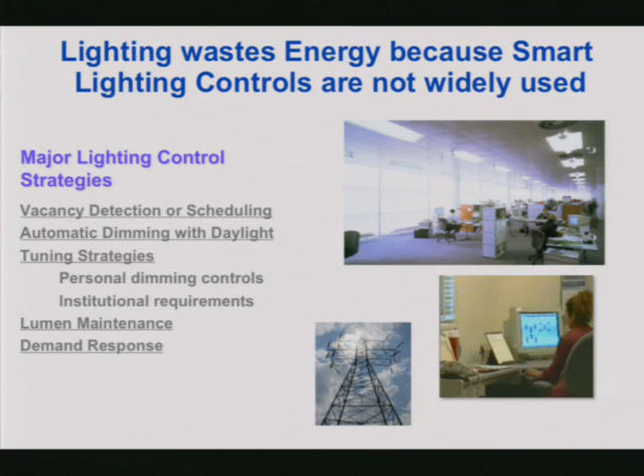In the next decade or so, the real push in lighting needs to be looking at controls, sensors and controls, and that fits quite nicely with the whole I for E theme. Lots of opportunities here, could talk for an hour just about this stuff, and I won't. We've been doing studies that show, again, 50, 60, 70% savings with smart controls, a huge opportunity.

So that leads me logically into the last piece here, which is the whole smart grid thing. A lot of you are actively involved in this, so I don't need to say too much. There's a lot of moving parts here, and this tries to show a few of them. We're particularly involved at the lab in the demand response area.

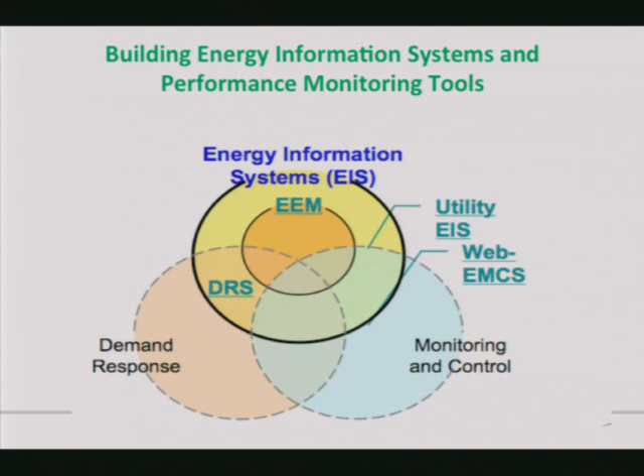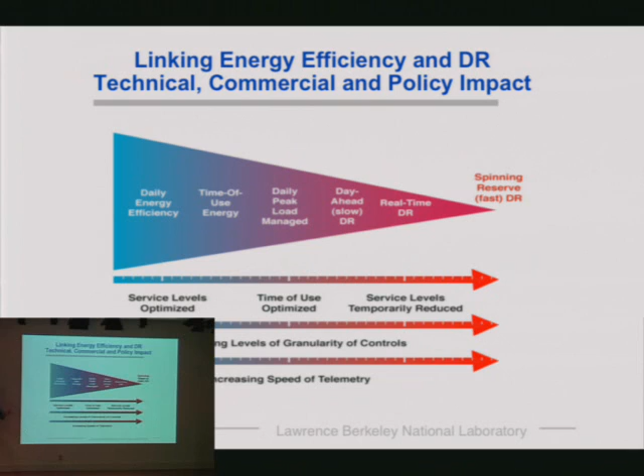And then there's a time frame here that goes back to daily or monthly energy efficiency. One of the intriguing things we saw with the demand response work is people did this stuff for 4 hours on hot afternoons. They said, gee, I could do this all the time. So something that was a demand response strategy became an energy efficiency strategy.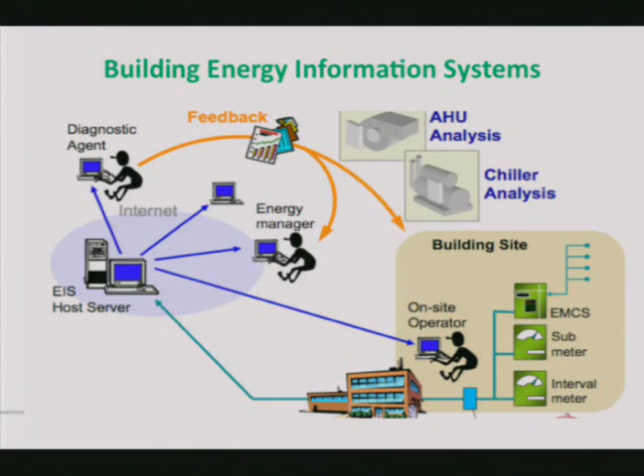The theme here is to have more information accessible to facility managers and operators than is currently there. The old paradigm is you get a bill once a month and struggle to look at what one number means. The new paradigm is you've got real-time information at a distributed level, at a systems level, and you can tell what's going on at the subsystem level — if it's fine, okay, if it's not, fix it. I'm saying that as if it's trivial to do. It's not. It's complicated, but it's one of the things where research is going on.

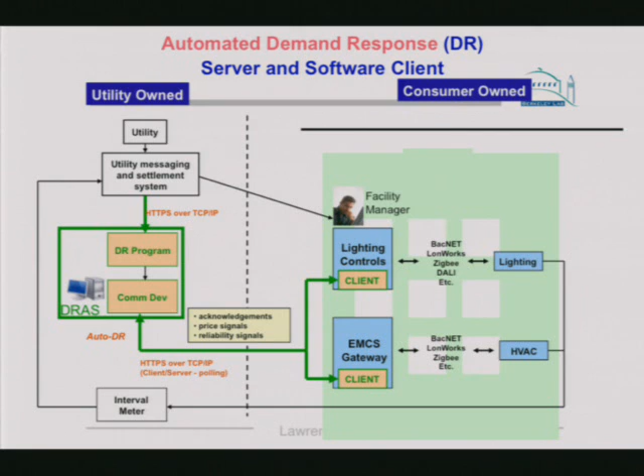Not just research, it's being deployed in the real world, and Carl Brown and CIEE are doing a lot of interesting work on campuses to deploy and make these things really work. This is the concept for the DR world, where the utilities send a signal to the owner. The owner gets to decide what's done, but doing the automated infrastructure, an open system, open demand response, is something we pioneered and seems to be working.

In the interest of time, I'll skip that. I'll just show you that we go back and measure things in the real world, and when the signals go on, you're saving 10% or so of the energy. So it works. It's been deployed now in hundreds of buildings. People are beginning to make a business out of this. There are companies that have been set up to go to a building owner and capture these savings for them.

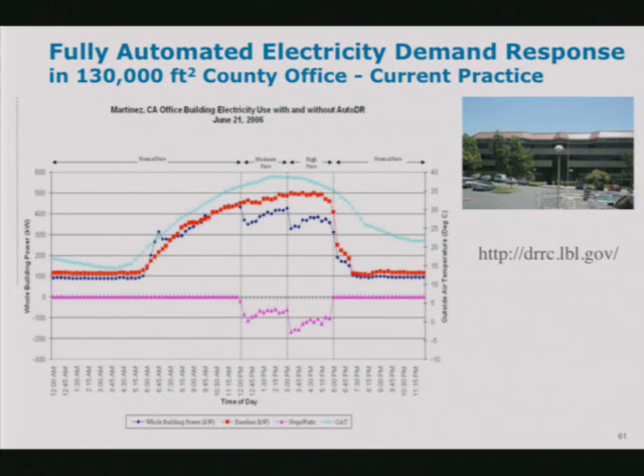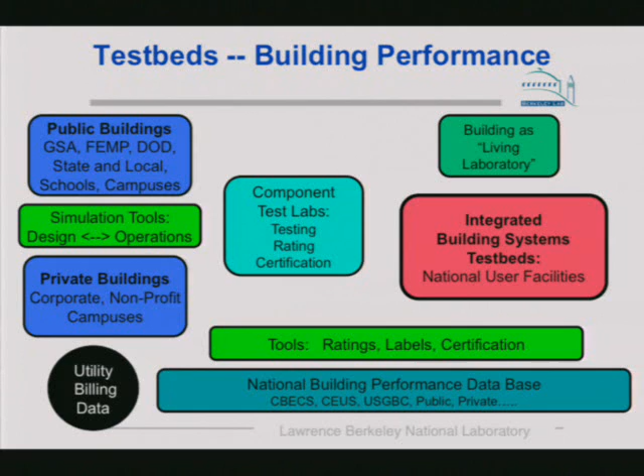Just wanted to conclude here with two sets of things. This is a messy, complicated slide that talks about measuring building performance, which is where I started. I want to show this because we just won an award for a national user facility in buildings, the first one we've ever had in 30 years, which is to look at this integrated building systems issue that I've been talking about piecemeal, but in a much more integrated way, tying components into systems — individual systems like heating, cooling, and lighting into an integrated building system.

I think what I want to show here is that we have funding to build a series of test beds that will look at different systems — skylight systems, HVAC, building controls, intelligent controls. There's a lot of opportunity here to collaborate and integrate with the research agendas and activities. And there's a simulation side of all this as well. This is going to be done up at, I think I had a picture of it.

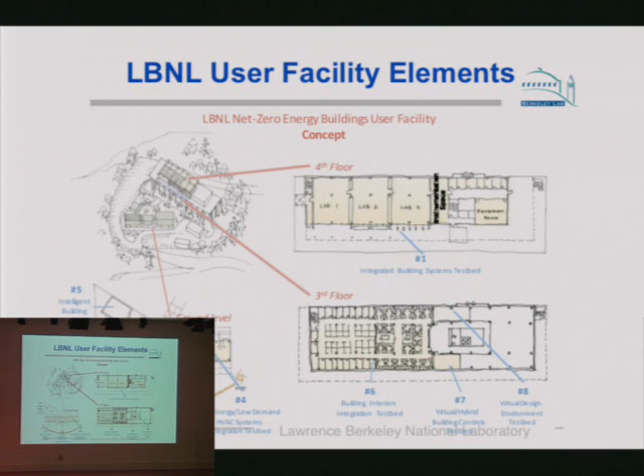If any of you have visited the building that I work in, Building 90, we're going to try and replace some of the old trailers out front with these facilities. We're going to eat our own dog food, I guess is the expression. On the third floor where I live, we're going to retrofit the entire floor and put all this stuff in and see if it really works. On the top floor, we're going to do a series of test labs. This could be pretty exciting over the next year, maybe. And as a user facility, researchers here can come to us and say, we'd like to test some new concepts and see how it works.

So what does all this mean?

In the basic science world, they talk about grand challenges - understanding the origins of the cosmos, DNA, quarks, and so on. So I think there's a grand challenge in the buildings area with 3 or 4 or 5 parts.

One is making the performance visible and actionable, which gets into the whole EIS and other stuff I talked about. Focusing on the whole life cycle of the building, making the links between the design part, how you design it, how you build it, how you operate it. Looking at the building as a system, you start with materials and devices, but you need to end up looking at the system's point of view.

To really make anything truly happen, you need to have this intersection between technology, policy, economics, business, behavior. There's a whole cluster of things where the behavioral part is intriguing - historically it hasn't been looked at very closely, but there's been a lot of new interest and work, with collaborations in a variety of departments here on campus in the lab trying to look at this.

The concept isn't new - there's a classic study from the 70s. Carl, when was the Princeton study done? 74 - which said if you measure energy use in 200 apartment buildings, it varies by a factor of 5 to 1. The apartments are identical, yet you get a 5 to 1 difference in energy use. So the concept that behavior drives energy use is not a new one.

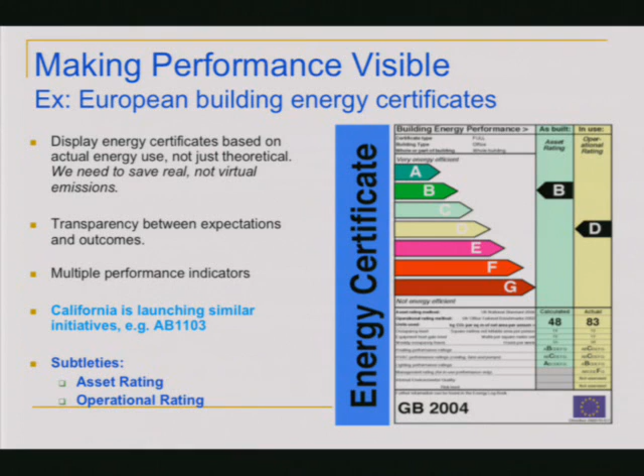In terms of making performance visible, there's interesting stuff going on in Europe - all buildings have ratings and labels. We're starting that in California. We're developing some benchmarking tools that are interesting. This stuff is all web-based, you can look at it.

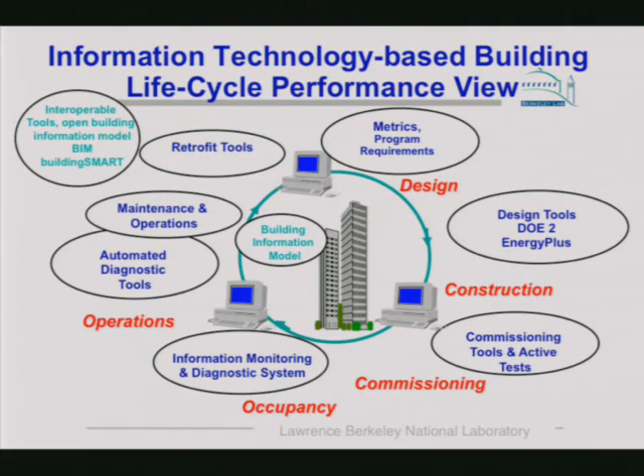This is that life cycle theme I talked about. The issue here is if you're going to do stuff across the life cycle, you want a common data model - a building information model. This is slowly but surely transforming the industry.

That's interesting - I guess it's telling me that my time is up now. But let me just, I have 2 more slides if I get to them. And if I don't, that's okay too.

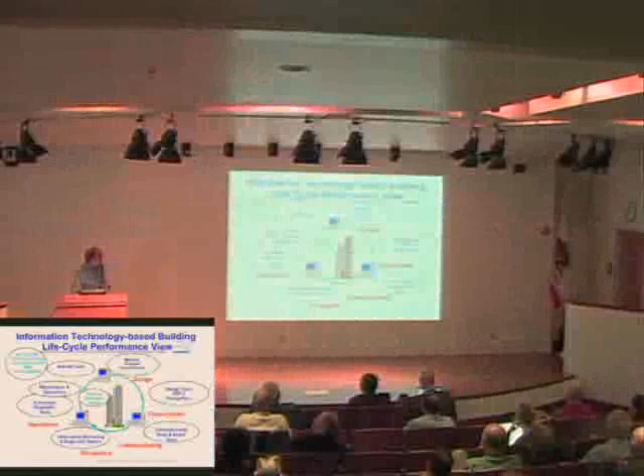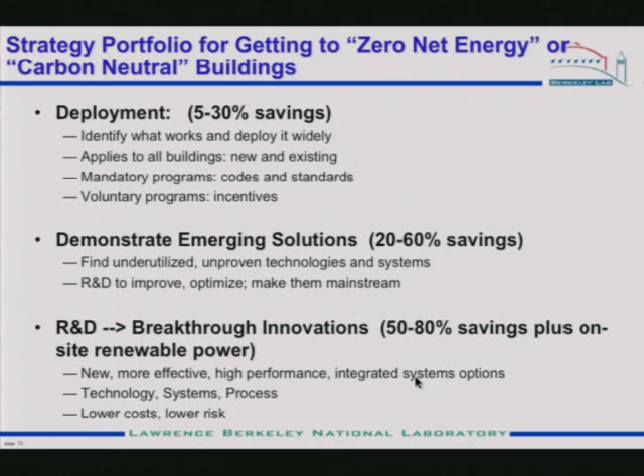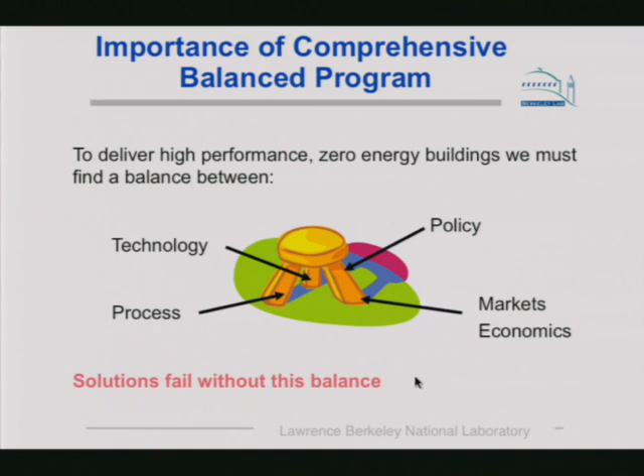Just to emphasize this point - we aren't going to get it done if we don't put all the pieces together. The stool is going to topple over if some of that is missing. People have spent some time thinking about how you put these pieces together.

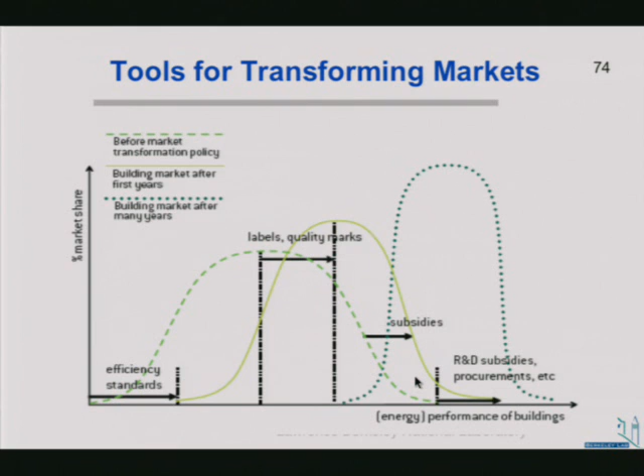Standards cut off the back end of the problem. R&D - so this is an efficiency scale here - R&D pushes the boundary out. Standards say you can't make a refrigerator that's less than some level, and you have a whole lot of Energy Star things, voluntary activities, incentives and rebates in the middle. Collectively, if there is in fact an energy policy at a state or national level, you're pushing that forward.

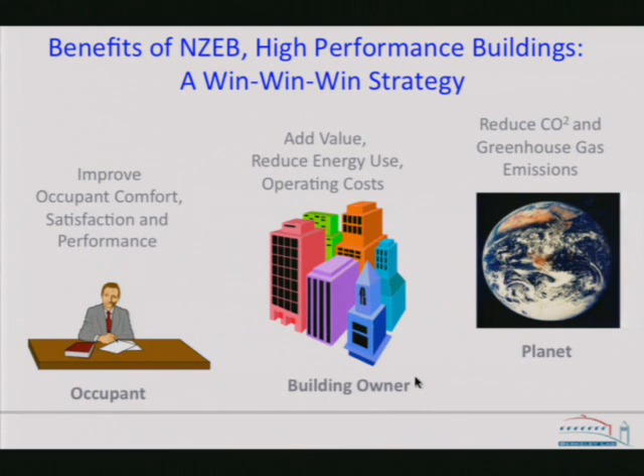And then a couple of quotes that have stuck with me. As researchers, we're always asked to go to the market and find out what the market wants, and we do that - that's important. But I think this is important too: you have to ask the question the right way. People don't ask for things that they don't know exist. So if you ask people whether they want 80% energy savings in buildings, they don't know, or they think it's too expensive - you aren't going to get that. So I think this is important.

We're really about trying to define the future we want and then inventing it, and that's critically important. For someone who's worked at it for 30 years, it doesn't happen quickly. This is a quote from Tom Friedman, but he got it from someplace else. I think it's the right way to manipulate the world when you can only influence small pieces at a time, and we're tackling enormous, huge problems, so simply let's not wait.